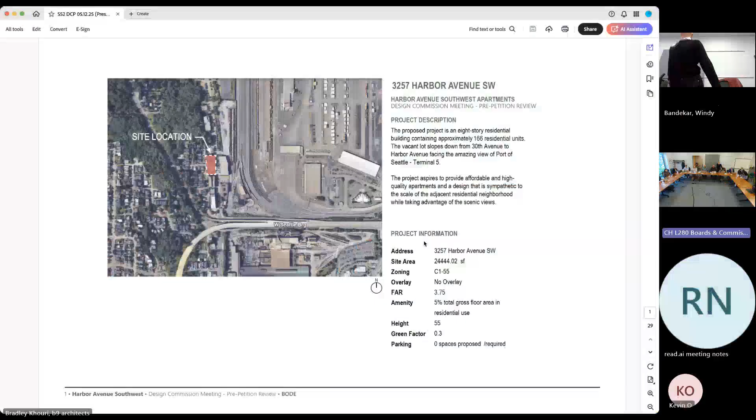From 10:30 until noon today, we have a pre-petition review for a proposed street vacation at 3257 Harbor Avenue Southwest. The street proposed for vacation is an unopened, unimproved segment of Southwest City View Street. We'll start with introductions. This is a pre-petition review, meaning the applicants have not filed a master use permit or a petition to vacate, so we won't be taking action today, but rather this is an opportunity for the commission to provide early input using the street alley vacation policies to guide the discussion.

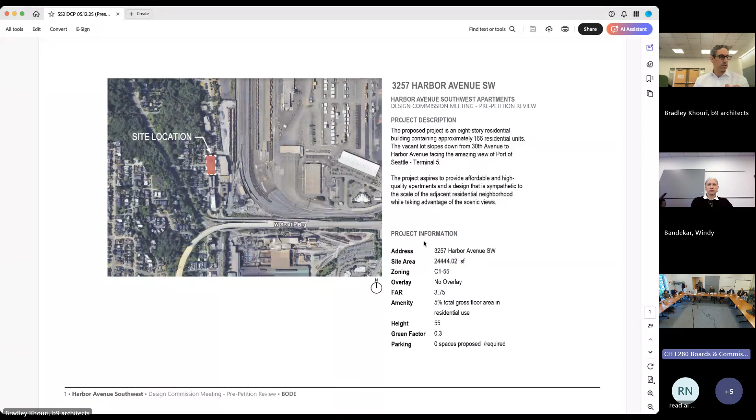The project's goal is to produce affordable housing on site, performing MHA and additional affordable housing beyond that through a series of programs. We haven't yet confirmed the total percentage and the total AMI goals at this point, we're still working on that, but that is the main focus. We're looking at about 166 units, a mix of family-size 2 bedrooms and smaller 1 bed and studio units. The building, because of the topography, is actually 8 stories.

So, let's see, cursor, great. I've never presented on a video call in a room. So there are 2 portions of the site, a north and a south. Southwest City View. It's gonna happen to somebody. Yeah, it's usually me, I'll beatbox next. Yeah, you're already starting, yeah.

Okay, so it kind of bisects the area of land that we're proposing to develop on. We're definitely interested in vacating the entirety of that right of way. It's 2,100 square feet of land, and it drops, as I mentioned, between 30th and Harbor. It is too steep to be used as a street and can instead be used to combine the sites to the north and the south, allowing us to make a larger affordable housing project, help activate this sidewalk space, and deal with Seattle's critical housing shortage.

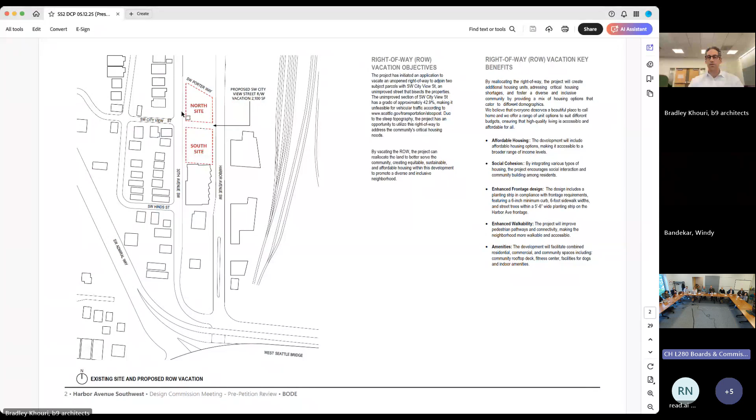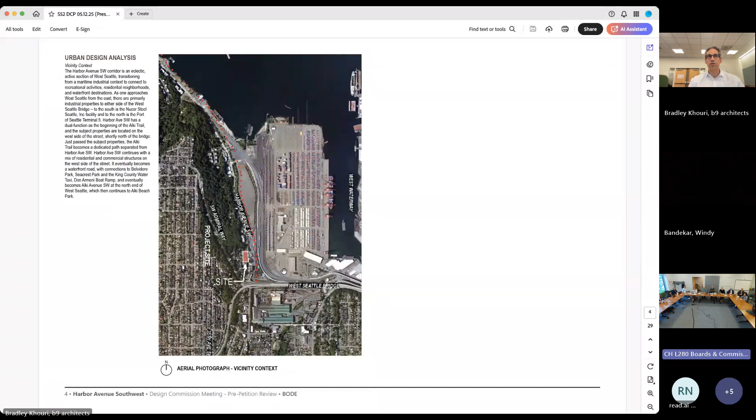We are kind of at a termination point of the West Seattle Bridge, down low as you would head around towards Alki. It's predominantly commercial and industrial land uses. There is some residential here.

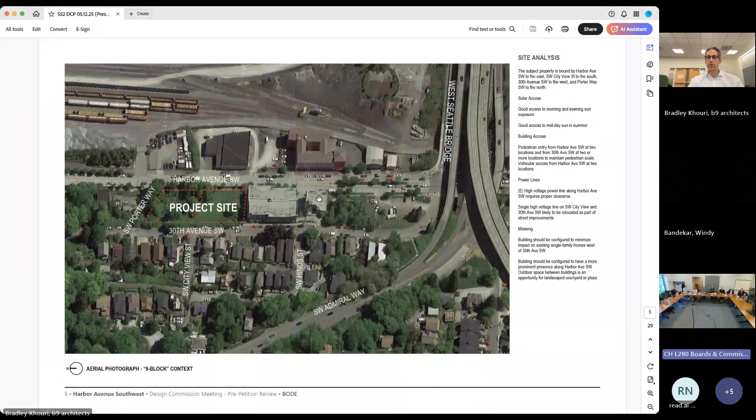Everything after that slide is going to be turned the other direction, so everything gets a little bit bigger, and north is now to your left. The uses across the street include a storage building, a parking lot, some condominium and apartment projects nearby, and behind the site, up on 30th Avenue, there are actually residential homes.

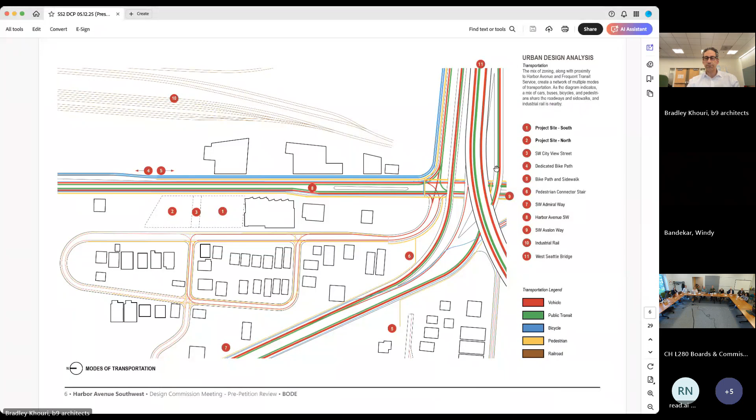We have Southwest City View Street as that area to be vacated. And then we have dedicated bike paths, sort of combined bike and sidewalk paths, pedestrian connector stairs. We obviously have Admiral that comes up the hill. We have the industrial rail line out over here, and then we have the West Seattle Bridge. There's a lot going on at this specific location.

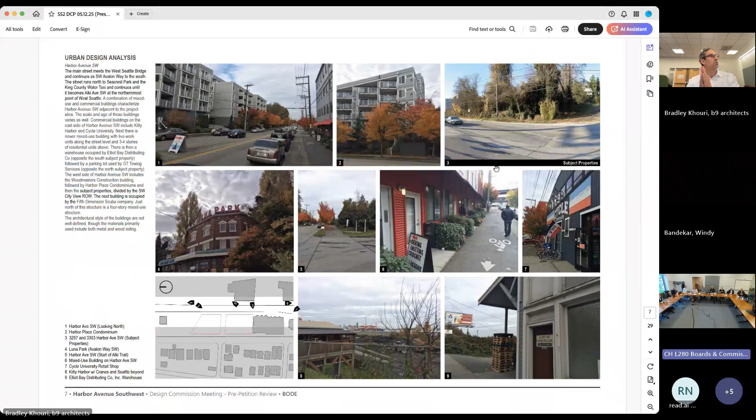Here are some examples of immediate uses: residential, sort of multifamily buildings, the commercial presence as well within the self-storage, and then these are some of the smaller single-family structures, low-rise structures up the hill.

The frontage is long enough that it actually takes two slides. So this is looking north on Harbor. You're seeing the multifamily building to our south, and then you're seeing the site area here.

And then on the opposite side, this is looking across the street at the bottom. So you're seeing the kind of parking lot, and then as you head to the south, you're seeing the self-storage.

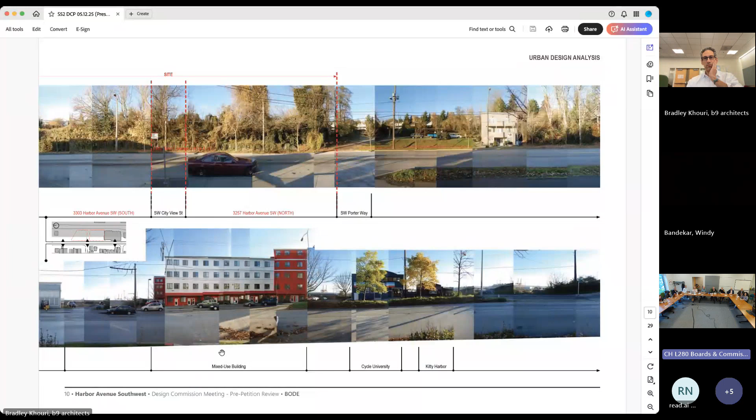And then this is looking at both sides of the 30th Ave frontage. At the top of the page is looking kind of over the site, and the Southwest City View Street is kind of right here in the center of the double page. The Southwest Porter bounds the site to the left, which is north. And then we're looking at the kind of lower density single family opposite on 30th at the bottom of the page, predominantly 3-story, 2-story homes. And again, that sort of continues across.

And then here you're seeing the back of that multifamily building that is to our south. It gives you an idea of the scale of what is anticipated for our site as well, in terms of above 30th.

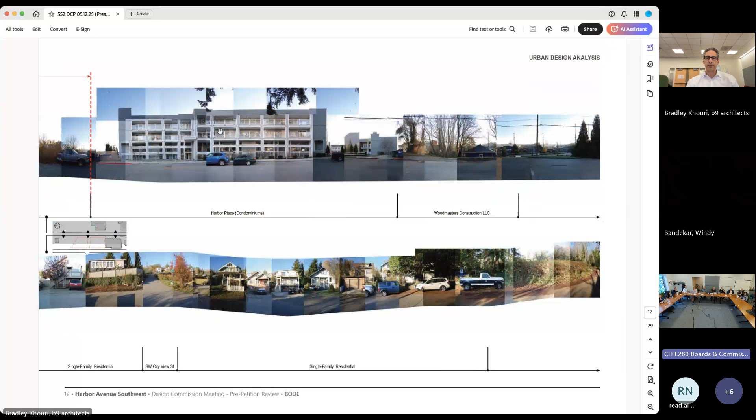Kind of zooming in on the site, the Southwest Porter Way—we've begun some work with SDOT because access for the site is challenging. We need to figure out how to deal with trash, storage, pickup, and so they requested all of that come off of Porter Street and not off of Harbor.

There was no parking that they're allowing along the frontage on Harbor. So basically we're looking to produce kind of continuous frontage that stitches across the Southwest City View Street right of way with planting strip, sidewalk, and then public benefit within that space. And the only vehicular connection to the site will really be for drop off, load and unload, or trash, into Southwest Porter.

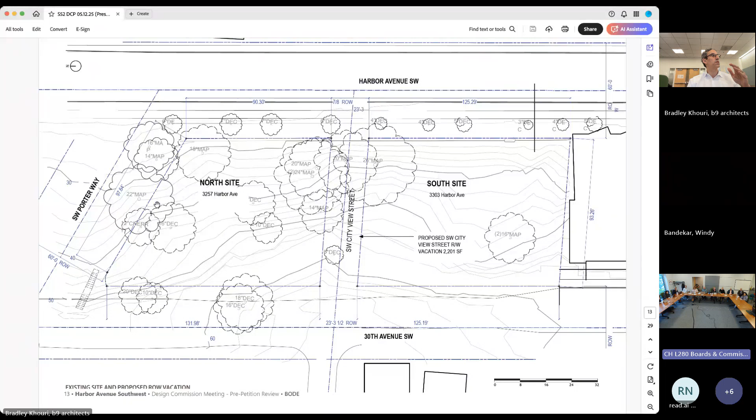It's also fairly steep, but it already provides connection to a very sort of rickety public stair here. And that's because it's not as steep as the rest of the site. As you can see, it's quite a bit lower here.

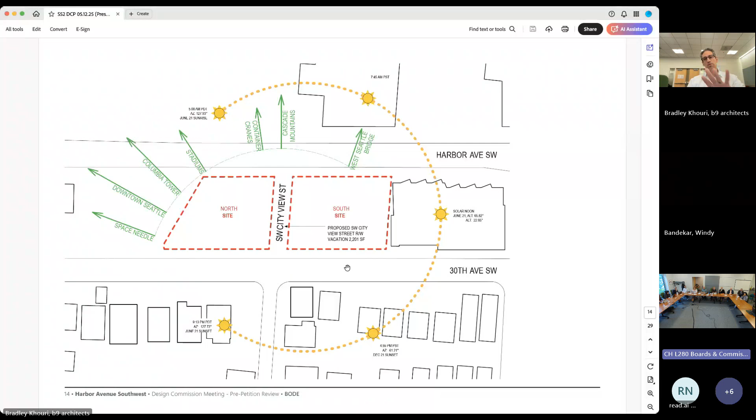It shouldn't be a surprise—the site has pretty incredible views from the West Seattle Bridge to the Space Needle and kind of everything in between, so stadiums and downtown, the mountains beyond. We'll also have very good southern exposure and sort of eastern views downtown. And then as you get above 30th, we get some western light.

Okay, this is the site kind of zoomed in. The dashed in area is the Southwest City View Street right of way. It is impossible to utilize currently—it is too steep to turn into anything meaningful.

And we've already begun the conversation with SDOT about a public stair being added on Southwest Porter as a way to improve the one that's there. It's actually a requirement on the project. Our goals are to enhance that through some of the public benefits.

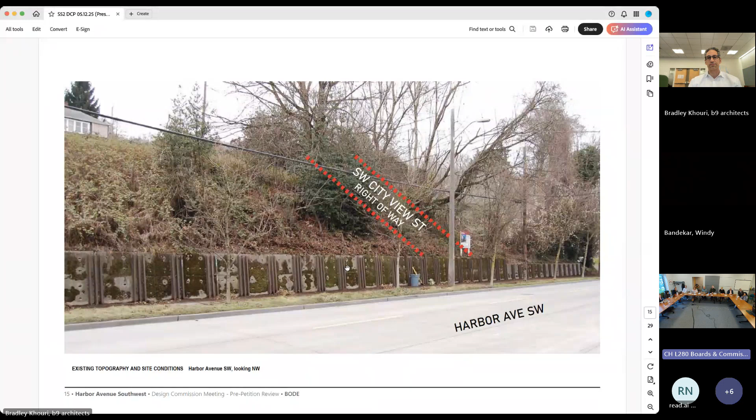So here you're seeing Porter, again the kind of site area and Southwest City View Street here. There's very strong interest to create a kind of stronger presence on our side of the block and to use the building on Porter, and then the potential entry location as a kind of mid-block activator and connection.

Across the way, we have the infrastructure of the bike pedestrian path and then the connection up to Alki Promenade as well as Jack Block Park.

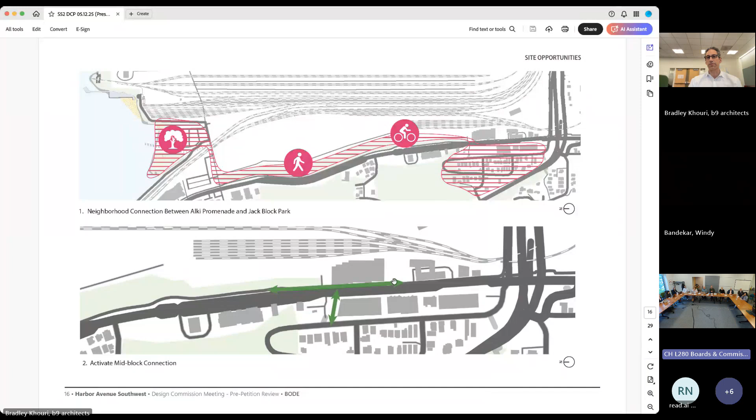All right, I'm going to start going into the proposed public benefits. We have a slide that shows the three together, and then I'll go into each one individually.

As I mentioned before, there is a public stair that's required. The goal is to build that stair into a retaining wall up at 30th, have it be a switchback that lands at a platform. The thought is that platform, instead of just being a stair landing, can become a viewpoint to downtown and into the water, and a small sitting area and mini park space.

The second benefit proposed is a series of planters. Our hope is that we can develop culturally relevant imagery on these, specific to this location and the history of West Seattle and this particular part of it. Those would be along that stair and really along the entirety of the harbor frontage. Because we're proposing residential uses at ground floor, we're pulling the whole building back 10 feet, so there's space on top of the right-of-way where we could add these and help soften and create a transition to the sidewalk.

The third, and perhaps the biggest of our benefits within the project, is to actually create a stopping point along the path and have it become the equivalent of a POP, a privately owned public space that serves as both an entry courtyard, kind of harkening back to the Southwest City View right of way. It's just shifted a little bit to work into the building. From the streetscape, it'll actually end up breaking the building into two masses, and this is full height.

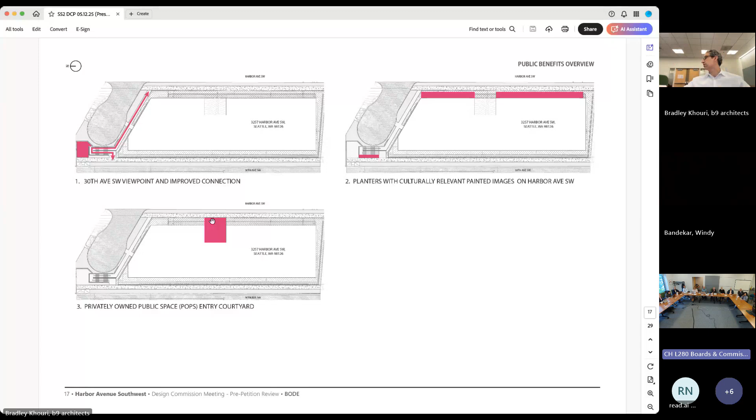So zooming in, these images kind of hint at what could be possible. The stair could have some kind of textured surface with landscaping, a place for neighbors to come and gather, or simply a place to pause as you're working your way down, which is a pretty long staircase.

We like the idea of the public viewpoint because we have so much to look at from the site.

These are just some examples of planters that could be a hint at what's possible, again trying to enhance the pedestrian experience. Right now it's challenged at best. Use this as a way to activate the streetscape, give something to the community that can be visually inspiring, and I think also hopefully informative and teach.

Then the last one is the courtyard. We've pulled a couple of examples of actual POPs around the city of Seattle. Our goal here is to integrate art and other features, maybe bike racks that are sort of sculptural, maybe something on the wall, maybe things within the ground space. There would be something of merit and intrigue that would actually pull people in here, so it's not just a building entrance.

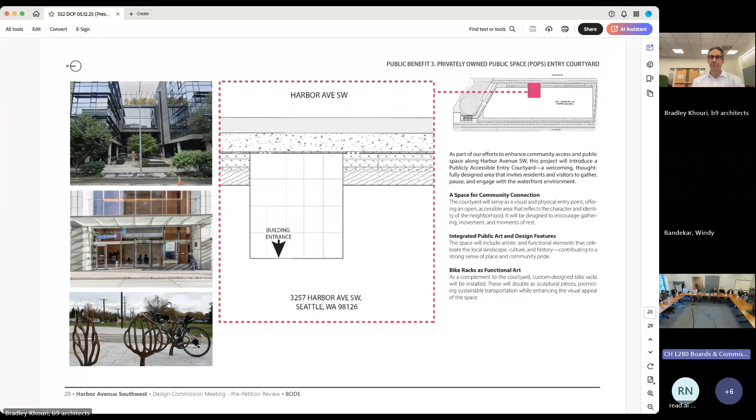So zooming back out, here are the three different locations: the viewpoint, the frontage planters, and then the courtyard space.

I'm going to walk through the building plans, and then I'll take you to some diagrams that explain the massing strategy and hopefully respond to the rest of what I just presented.

Southwest City View Street is kind of right in through here, so we're carving away a pretty significant chunk of the building all the way up, acknowledging that the street isn't here, and also adding public space on the site where the street could once have been. It is our primary entry as well, and there are units around it. These are the potential areas for patios for those units, with planters separating them. All our bike parking is proposed at this lower level, along with other back-of-house utility spaces.

The second floor is where we would pull in from Porter and have access into the trash room.

It's a deal to navigate, and we're working with civil engineers on this already. To help accentuate the recess, we're actually pushing 4 units out, say 5-6 feet on either side, as a way of responding to the location of the right-of-way we're asking to vacate, and breaking up that facade as we work our way from south to north.

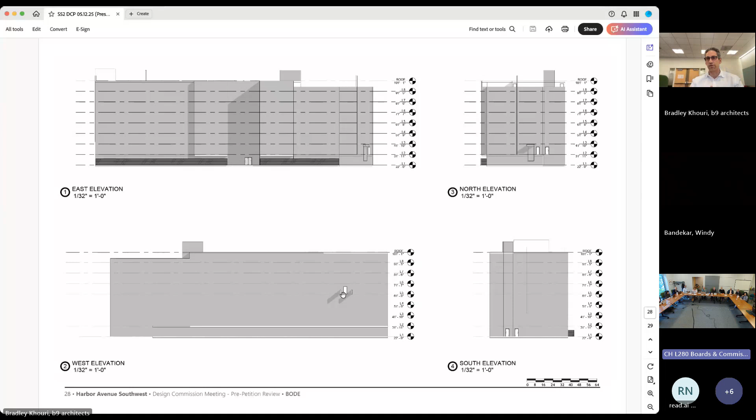So in summary, in terms of the strategy, we have our north site, our south site, and City View, Southwest City View Street in the middle, proposing to stitch this all together into one contiguous site. Coming up from our bounds, we have no setbacks except for the 10-foot from the right of way, we're actually pulling in from all sides. Then we look at how that right of way can influence the project and create some method of connectivity and reference back to it, which is this sort of removal.

We start to refine the massing, and end up with our lower deck at the corner at Southwest Porter, and then our main entry flanked by the 2 projections out. Thank you.

Shane? Yeah, I was just looking, I was just gonna click to see. Thank you, Brad, thank you. I don't think there's anyone attending online. Yeah, okay. We want to make sure anyone attending who wants to make public comment gets up to 2 minutes. I'm assuming you're speaking for your client and all that. Do you want to add any more? No, no, covered it all.

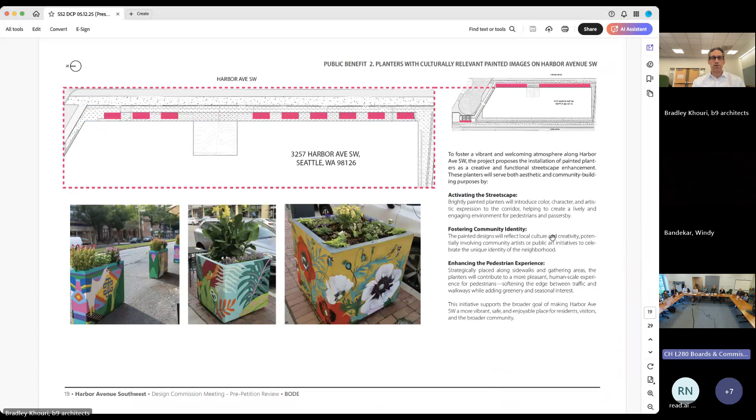Do you have more articulation of what you mean by the overlook on the stairs that you were asked or required to provide? I'd like to clarify—I wasn't at all of the early meetings on the stair. Our understanding is the portion that's not the big shaded pink area is required.

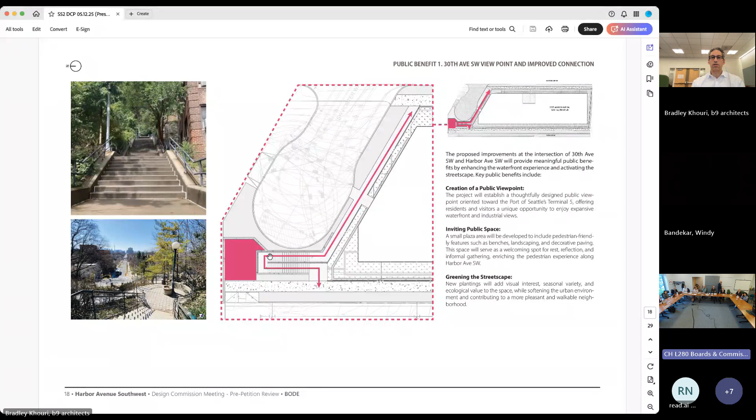So we're proposing to add a viewpoint at the landing, expanding the landing by 300 to 400 percent. But that viewpoint is lower than where you start the stairs. That is correct—so it's not as good a viewpoint as the top of the stairs. Yes, that's correct. It looks over the parking lot across the street.

It's looking over all this, so there's nothing to obstruct its view. It would be better higher. That could be a discussion—shifting the position of the stair or relocating the viewpoint.

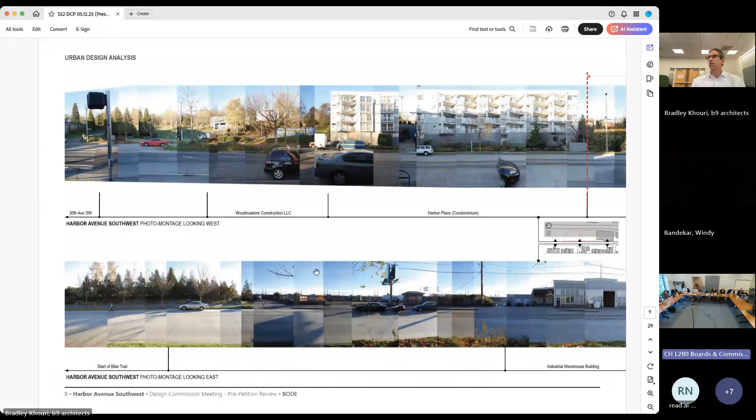We added it as a place halfway up the stair, a spot to pause. It's a big stair. I think I'll pass it now.

Caitlin, quick pause—we have Jackson from SDOT online. Hi Jackson, I believe he has more information about Brian's question relating to the stair. Jackson, do you have anything to add? I'm happy to wait if Michael wanted to get to me later, I didn't mean to interrupt. If it pertains to the question Brian asked, we can go ahead and get that information.

The question was whether future development up the hill west of 30th would be required to provide that staircase in City View if the zoning changed. The answer is no. The only development that might be required to improve City View would be the north site of the current project. So if this project didn't happen and the north site redeveloped, or the south site redeveloped first, the one fronting City View would be required to provide a staircase in that right of way. But future development in the neighborhood west of 30th would not have to do that.

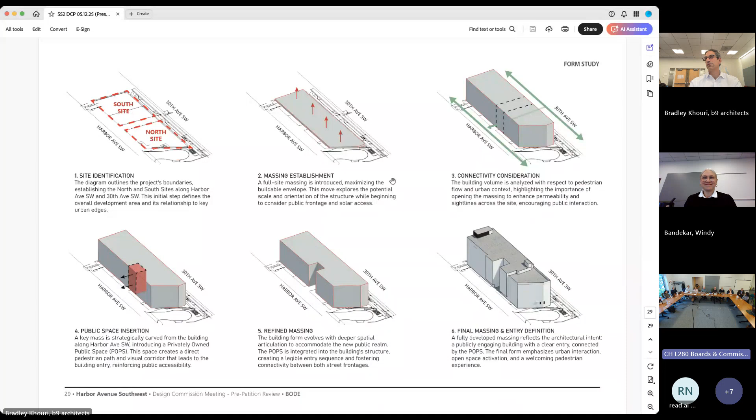We were talking internally about how many of the two bedrooms had light into both bedrooms. I'll sort of go off track a tiny bit.

So because of the commitment to produce affordable units, the Office of Housing also reviews the units. Does anybody do projects that go through Office of Housing? Okay. So they have requirements about daylight. If it's an open one bedroom, meaning the bedroom doesn't reach the exterior wall, then there has to be a window in the exterior wall and a window in the open bedroom, or an opening that faces the window.

And so you can't do that with a 2-bedroom unit, it just doesn't work. So we've been looking at different strategies to the units. We're fairly early in the process, but we're getting it to where the kitchen isn't on this wall, and this bedroom rotates so you get light into this bedroom through that wall, and light into this bedroom through its portion that looks past that wall. There could be a small dining area or little office space in the widened portion of the core.

The notch creates a far significant reduction in the number of units that have this lighting issue. The percentage of units that are affordable will all have access to light per Office of Housing standards. The rest, which maybe don't perform to that level, will simply meet building code, which does not require windows.

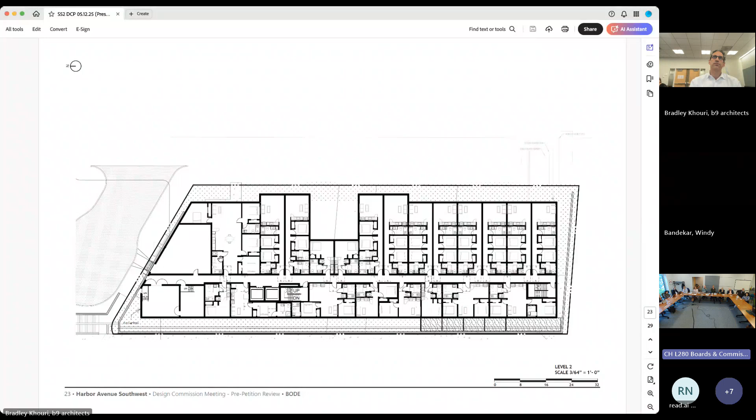Do the buildings get deeper when it gets to 30th? No, it stacks. But you have a door there, so you have a little bridge. Yes, there's a bridge, I didn't pick up on the bridge. Yeah, part of the reason the building is as tall as it is, is it's pulled in from all sides for the FAR. So I didn't catch the bridge, that's interesting.

One more question: did the team study 2 separate buildings at any point? I'd have to look, I don't think I was part of that early study. So I'm curious what drove the decision, was it from day one that this was going to be one building? Yes, again for the reasons I said earlier, it just... producing housing in Seattle right now, if anybody's doing this work, it is incredibly difficult—permitting costs, financing, all of it.

Any advantages that we can create, and then provide benefits from, is a benefit.

So I guess my only question, just to clarify on the backside, there's basically a two-story well. So from the street you'll kind of see a guardrail or something like that, and then there'll be kind of a 20-foot deep pit. Okay, got it. So you said the connection was on the fourth floor, so it's a 4-story well? It's just the third and second floor that are the well.

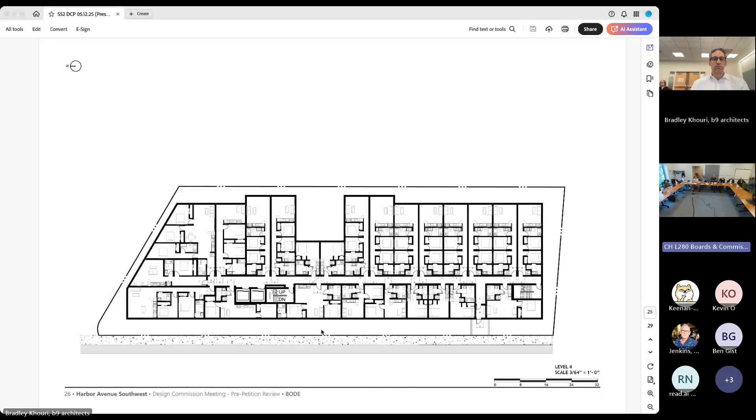Okay then. So again, I think our role now as we move into deliberation—we're not taking a formal action today, but if there are any recommendations or comments people have, we want to pass those on. So I think what we'll do is organize those around the specific categories we'll look at when this comes back for the public trust, which are access and circulation, utilities, free speech and public assembly, open space, light and air, views, and then land use and urban form. I think it'd be best to array our comments around those.

So let's start—yeah, I think we could array our public benefit comments around those categories, but if there's anything additional with public benefit that stands out, that's great.

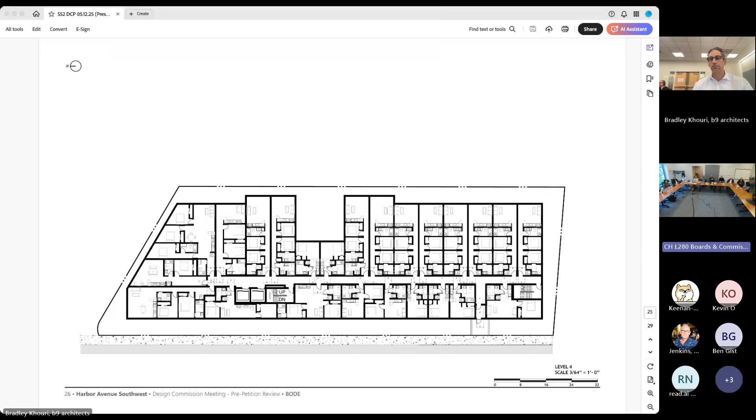I agree with that. Brandon, could you put up the site plan? Yeah, I think that would be good. Maybe just put up the site plan for orientation. That's one, just a large one. That's fine, that's fine, that's the basic. Yeah, thank you. So first, I'm just going to open it up.

Please raise a hand if you have a comment or recommendation. So for access and circulation, any comments or thoughts or concerns? I think we talked about the stair on Porter and how that mid-level platform is not accessible to the general population—wheelchairs, etc. It's also not a better view than what you'd get at the top. So thinking about that, there are modifications there that would be recommended.

To me, it seems like we have to do that—it's not a public benefit, that stair has to be reinstated. But the overlook is not. The overlook could be the public benefit, but it doesn't seem very public at mid-height, nor does it seem very reasonable at mid-height.

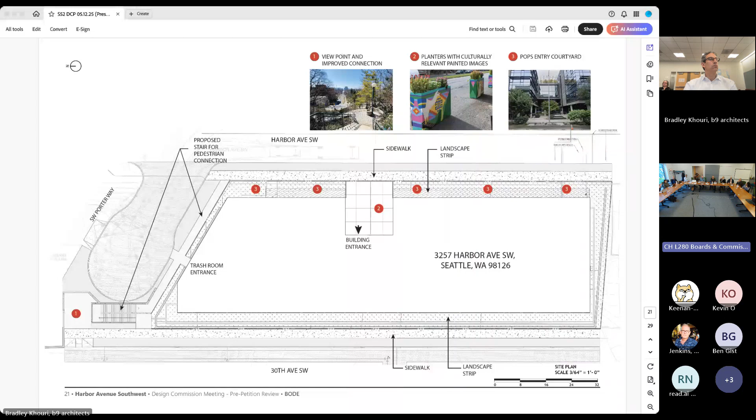I don't see it as a public amenity enhancement - I think it's just something that needs to happen. And it then lands near the trash room, also near the vehicle logistics that happen, which I hate to bring this additional piece of public benefit into, but you mentioned studying the corner for something public benefit related compared to that building entrance.

From my perspective, a notch in the middle of the building, while having a lot of benefits on the development and allowing light access to the units and creating a nicer mid-block entrance, gave you great units on that corner instead and great light access on that corner. I do feel that if you have a public stair coming down on Harbor, that's actually your more public moment. So you could say there's public benefit at the top at this overlook, and you have the stair that's part of the requirements of the project.

Then is there something public happening when I land at the bottom of that stair? That seems more public to me than a building entrance notched into a building being called public, because that's always going to feel like it's owned by the building to that lot line.

That was my next point. 100%, I think you have a really strong narrative you can build on the public space if it were looked at the corner. I don't think it's absurd to take the public space away from the lobby - I think that happens quite often, where the public space can be divorced from the lobby entrance and you still have that lobby entrance, and that's a really strong move.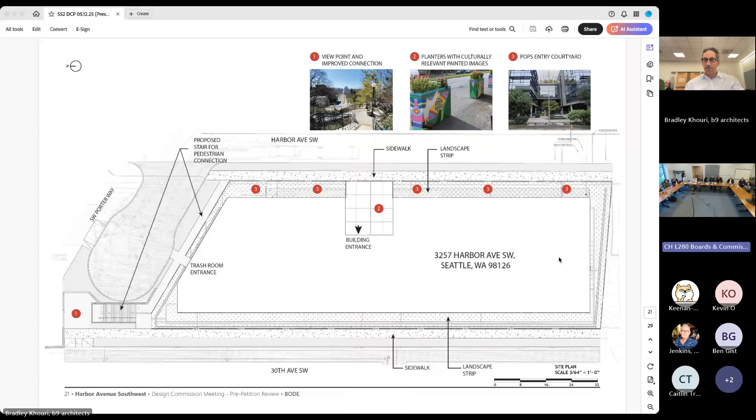I had a comment about the courtyard. Can you share the dimensions of it? You mean the proposed courtyard? We can guess, hang on, we can give you a pretty good estimate. So it's like 30 by 45, probably, something like that. I was wondering what it was - somebody guessed that over there. I was a little short, but I was getting close.

If your scale is correct, then it's not that - I'm going to the property line. Oh, I didn't go to the property line. So it looks like it's like 16 feet wide, maybe. No, I think the units are deeper, it's 50, 2 units wide. I think the scale's off, if you look at it. It's easier to measure when it has the paving lines on it, otherwise the sidewalk - you know the sidewalk is 6 feet, that was my measure. Units are 50.

I think the comment I would have there is that there are a number of street and alley vacations that have included private public plazas—it's not an uncommon public benefit. I think the question always is, how does this feel public? How does the public know they can access it? Does the public want it? It gets back to the public engagement process. Is that considered of value to the broader public? So I think we would want to understand all of that when this comes back to the public benefit discussion, if that's going to be part of the package.

A very quick thing, which we already talked about, but it would be great—I think we'll need to understand the level of affordable housing in the building the next time it comes back. If we can just mention that early, that would be great.